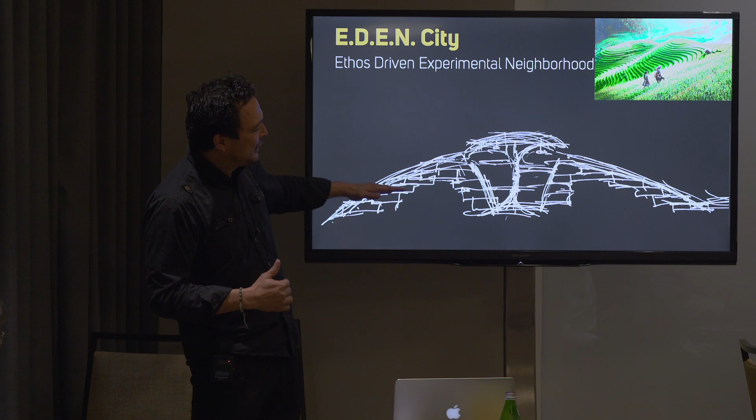But no, like the idea of using very cost-effective, simple — we're really trying to do anti-architecture here, basically. What if this wasn't about architecture? What if it was about actually using very cost-effective prefab, even shipping container, whatever.

But basically, just stacking those in a landform where we would use the land for retention, but we would also gain a lot of side benefits with that insulation, what have you. Stack that in a way that it kind of does create this kind of unique landform, but then at the center have a heart of the community, a gathering place that has that wonderful sense of spatial enclosure that all great gathering places, piazzas, third places around the world have.

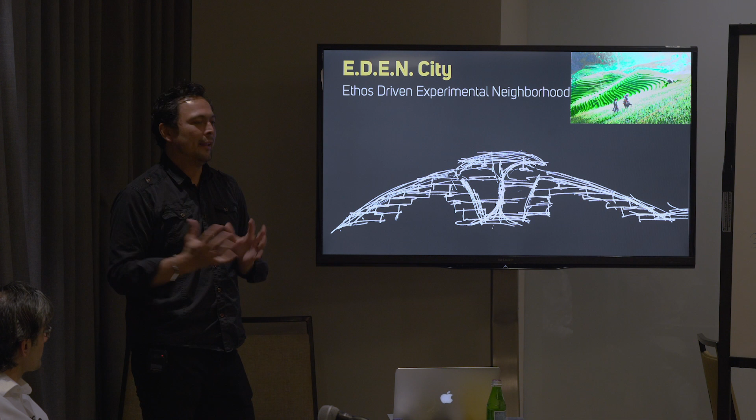Unfortunately, so often in suburban America we're missing that, when you're eating at the Starbucks in front of a big parking lot and you're just exposed to nature, traffic, whatever. It doesn't psychologically feel like a wonderful outdoor room with that sense of enclosure. We just thought, man, that would be really cool to have this wonderful urban grotto that felt like the center of a volcano caldera, kind of space.

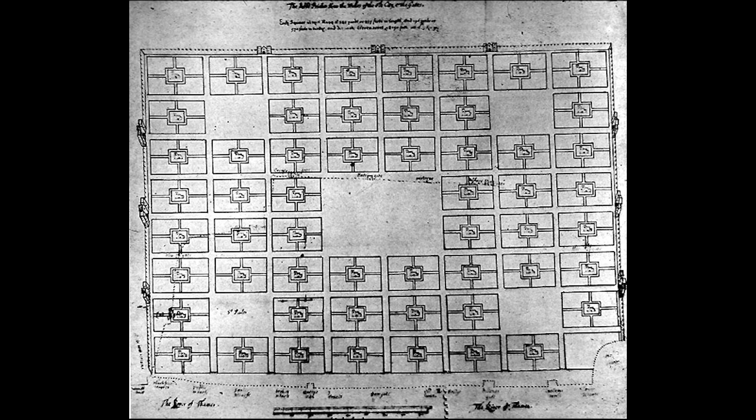And so this was putting the plan into scale. I could go on and on about urban planning history and what have you, but for the purposes of this thought exercise, we actually decided to place the project in North America. Shocking. And in North America, we have this history of the way the land was surveyed following the Jeffersonian grid and the Louisiana Purchase.

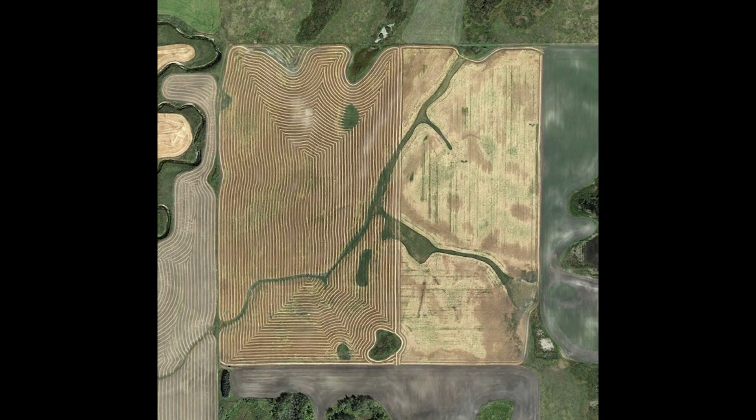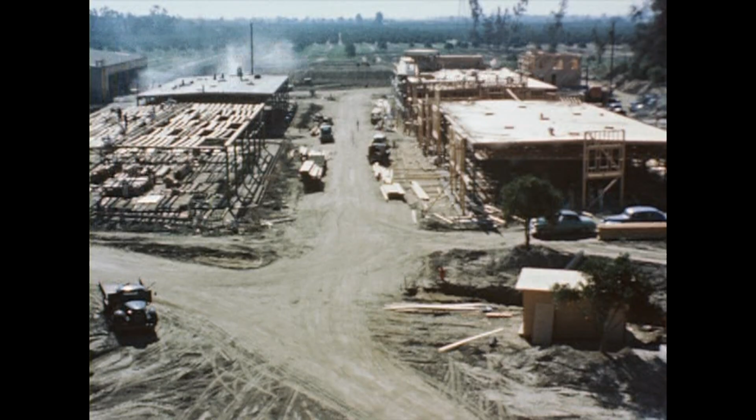America's kind of on this survey grid of a square mile grid. There's these 36 square mile, 6x6 grid townships. This phrase, 40 acres and a mule. The reason Walt Disney bought 160 acres in Anaheim was because that was the typical quarter section of land, that quarter mile. And so again, we actually based it on this cellular scale.

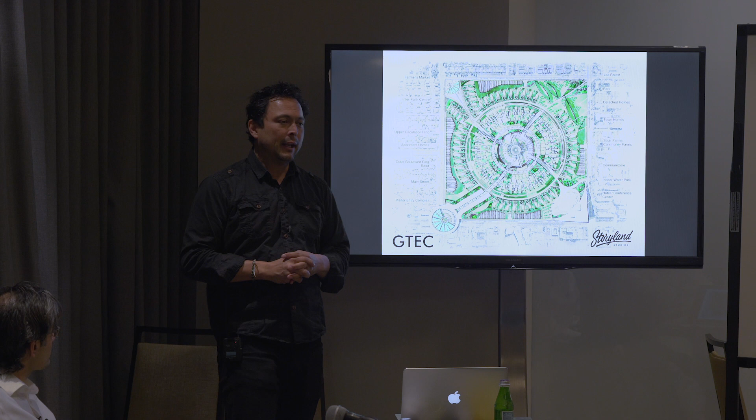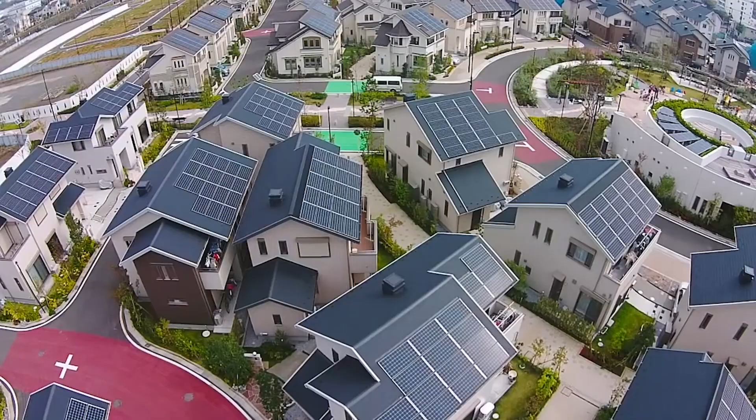We asked ourselves, what would be the minimum critical mass? Not just for a standalone prototype, utopia, whatever you want to call it, but what would be the seed that could turn into a tree, that could turn into a forest? What could be this minimum critical mass that could be not only an experiment for an individual neighborhood, but something that could be a viable model that could be replicated into an entire urban city and potentially an urban world that could be a more sustainable path forward.

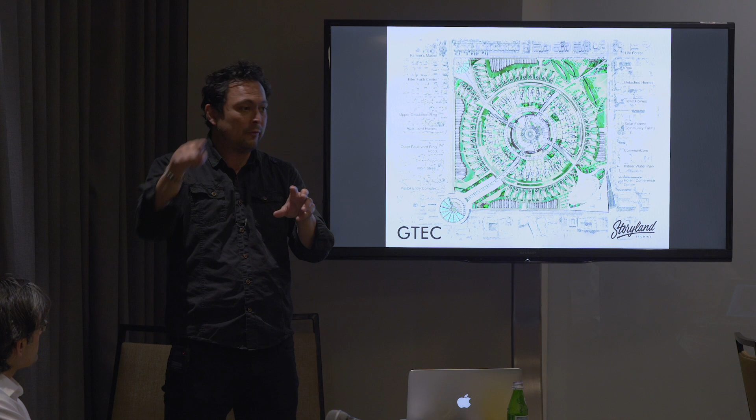So with that, we actually looked at what would be the appropriate scale. We didn't look at even a square mile, 640. We actually brought it all the way down to the old 40 acre and a mule scale — what would a minimum critical mass neighborhood look like at 40 acres that certainly could be scaled up to include 4 of those nodes, 4 of those neighborhoods, into a very walkable 5-minute walk radius, quarter section of land that would be about the size of any medieval walled town.

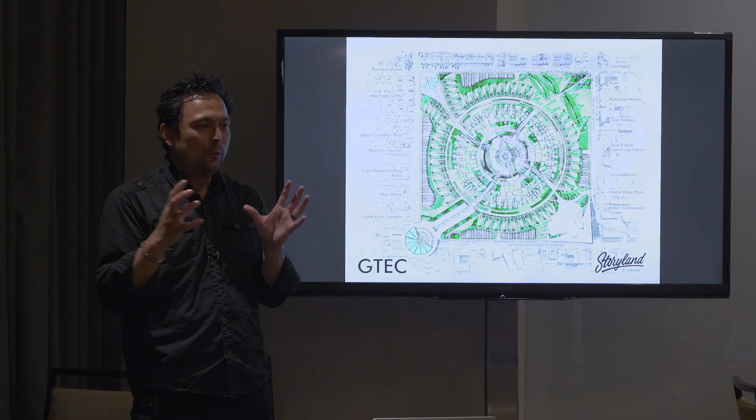Think of Siena or a Tuscan Hill town. 5-minute walk to the center of the town well. But we wanted to start off with that great human scale. So that's basically what you see represented here is roughly a quarter mile section.

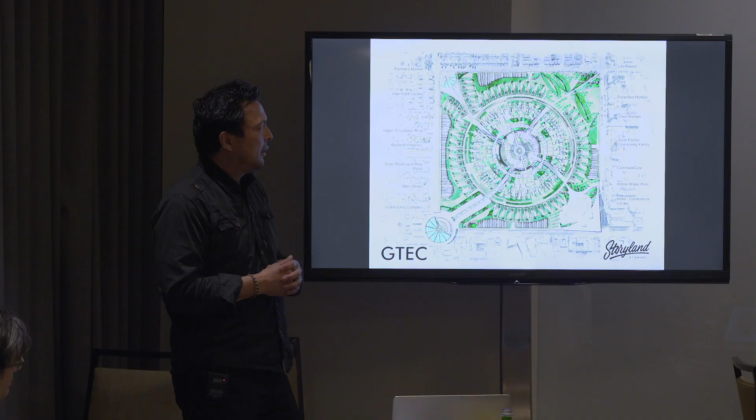Just a couple of behind the scenes, under the hood kind of operating paradigms. One is that economically we had one foot rooted in the world that I live in, which is working for for-profit clients that have IRRs and ROIs and residual land values in an urban context. So basically the idea that this had to be economically not just sustainable, but actually had to have a business model.

So just some fundamental things that can be easily thrown out: one, that there's an economic engine here, which is actually twofold. One is that it would be something worth seeing, that this would be a critical mass visitor attraction that could be located in a major U.S. urban area.

It could be located in a tourist area, so places like Orange County, Orlando, or Dubai, for example. The second, there's a major visitor component, with a potential revenue source here of hotel, conferencing, and so on.

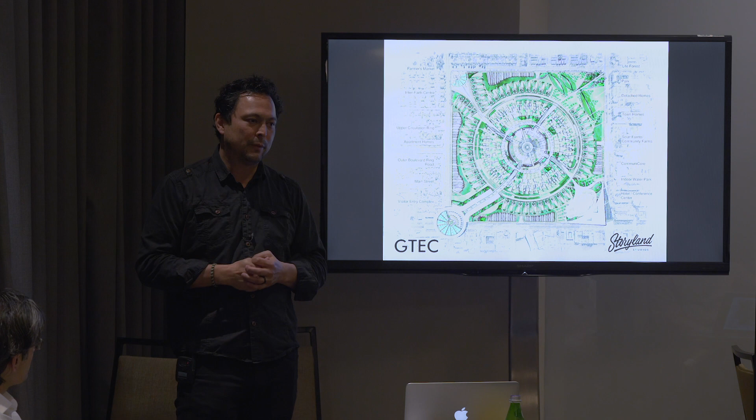The second component is a model that wasn't too far-fetched. There's been tons of Quaker and Mormon and religious colonies and utopias in history, but what we thought wasn't too crazy was the idea of a lifelong learning village, essentially a college town, that classic town and gown model, whether somewhere we'd like to emulate, like Oxford or Cambridge, or somewhere we can stick our nose up at, like where I live in Irvine, Orange County.

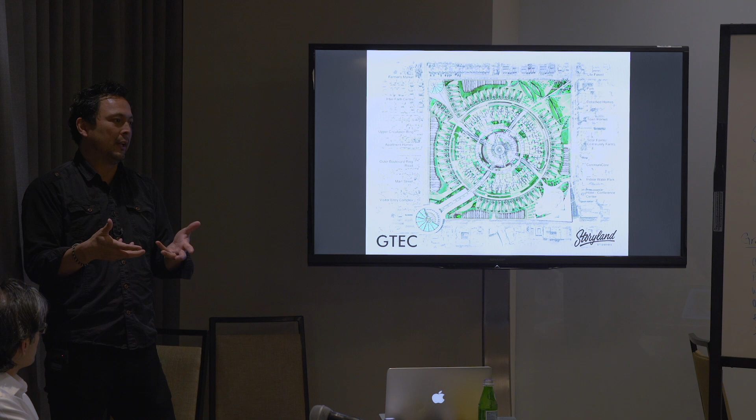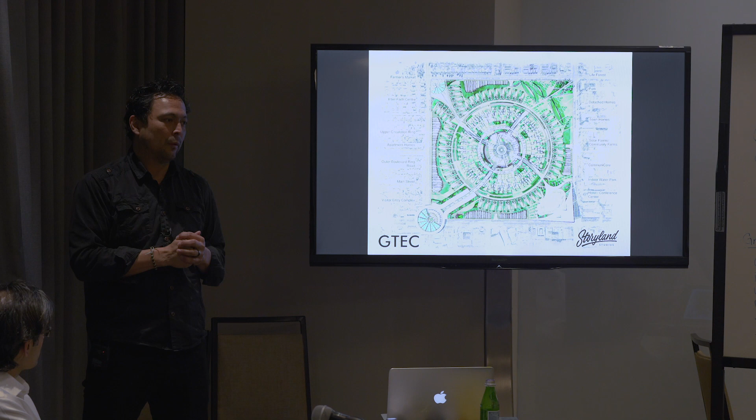That idea of a college town model, but not just oriented around college, but lifelong learning, would really self-define who would have the opportunity to participate. It would also shorten the duration. These wouldn't all be lifelong residents - you'd have a solid majority of folks here for a certain duration, whether based on their education, their specific aspect of development, or they're part of building, nurturing, ongoing maintenance, or faculty or staff.

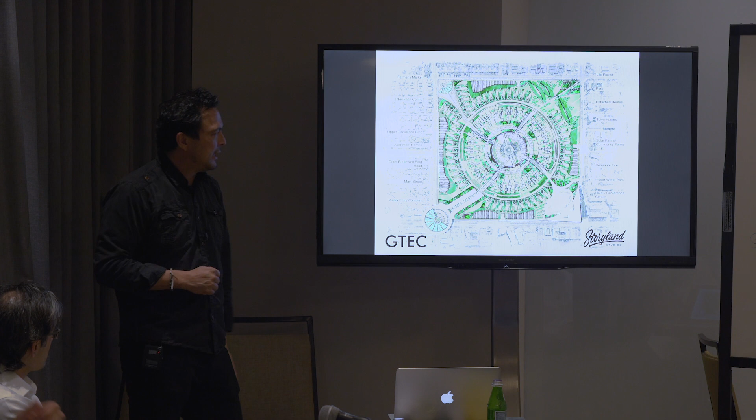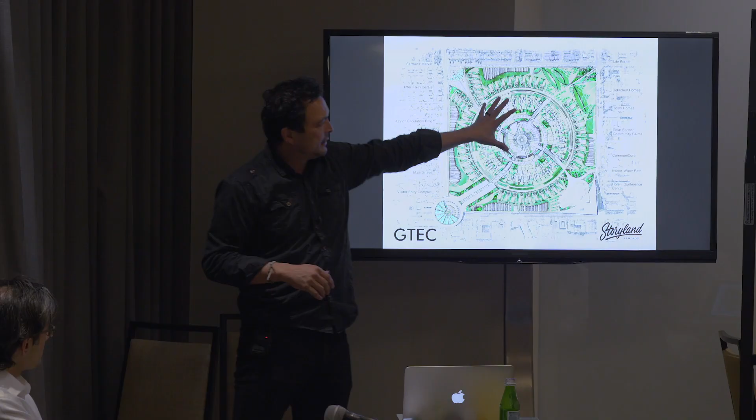So those are some high-level points I won't get into further. Essentially, what we have is a 100% intersection, and essentially what we've done is nothing too crazy - the parking is at grade level. We've got a couple of access points in the grid, so we're not doing a massive parking structure.

What we've done is structure the development - many of you live in areas where you see these podium apartments going up, with the same 4 or 5 story stick-built apartments above ground level or podium parking. So it's essentially that type of construction, nothing too radical.

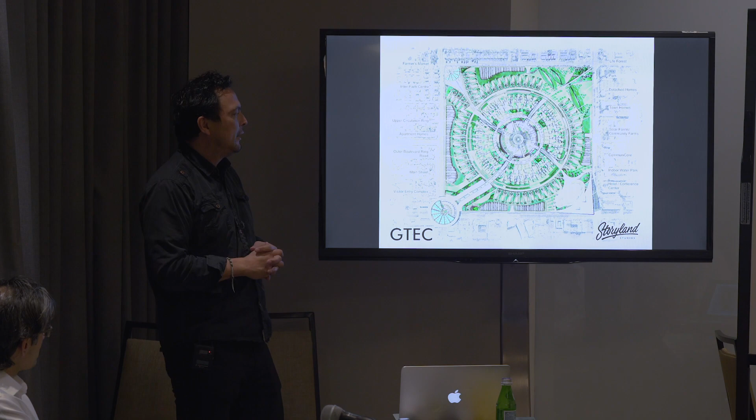At the 100% intersection, there's a visitor entry complex that would be the focal point, the first impression, primarily for visitors. The radius is defined by that core 5-minute walk to the center - this is the central piazza, town square, that we're calling the community core.

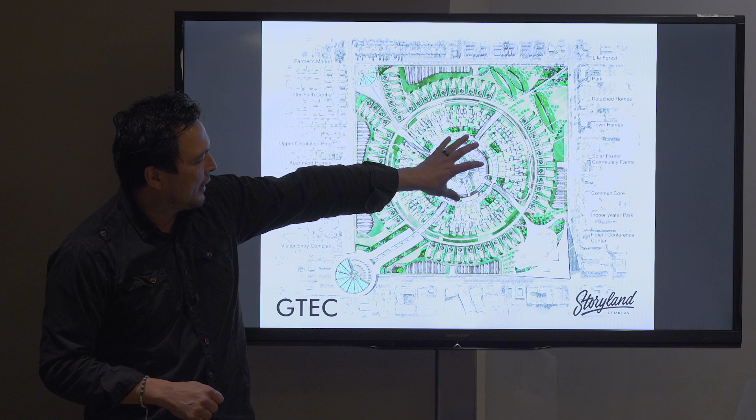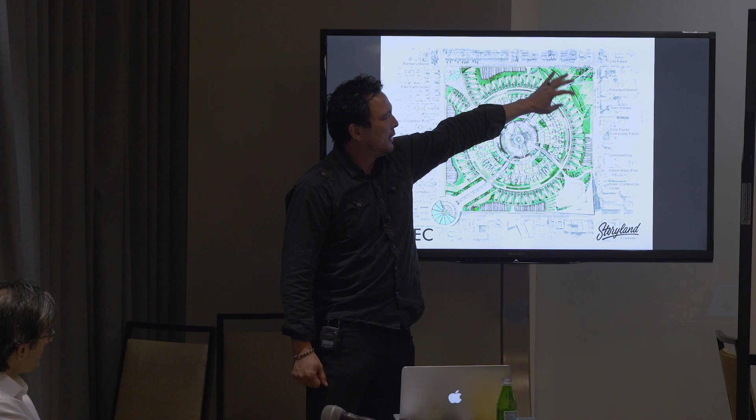Along the edges, we have different uses - for example, the hotel conference center over here, this idea of a park combined with a life forest, which is an alternative to a typical cemetery or graveyard, a farmers market, and some different focal points at those commercial corners that could be viable for adjacent neighbors.

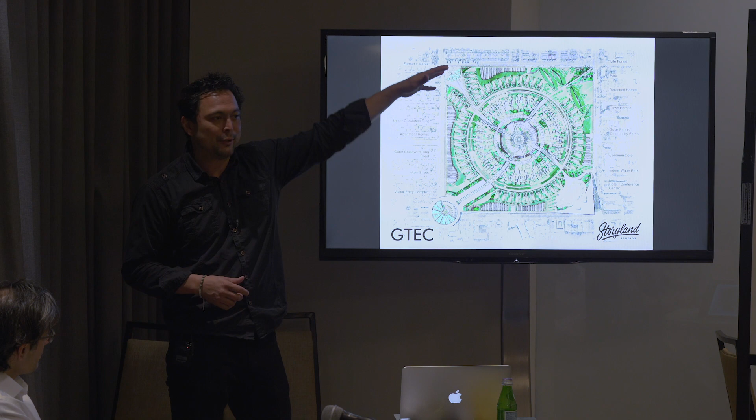So at some level this works as an urban infill project. It also works as a standalone project that could be sitting out in the Nevada desert. This is just an aerial view, and again, to be clear, there's no architecture here - this is quick vision-casting 3D modeling.

The idea of this elevated pathway largely carries an elevated track for the personal rapid transit system, which is half a ride - it's an attraction, part of the appeal, similar to a Universal Studios tram tour or the old Disney People Mover. It's a visitor attraction that anyone would come through without getting in the way of residents or students.

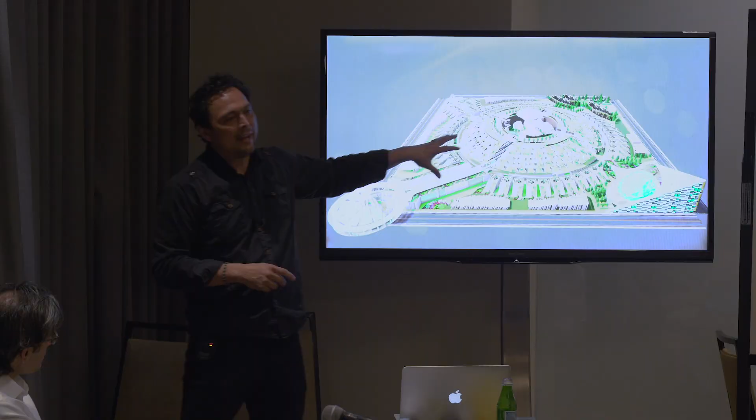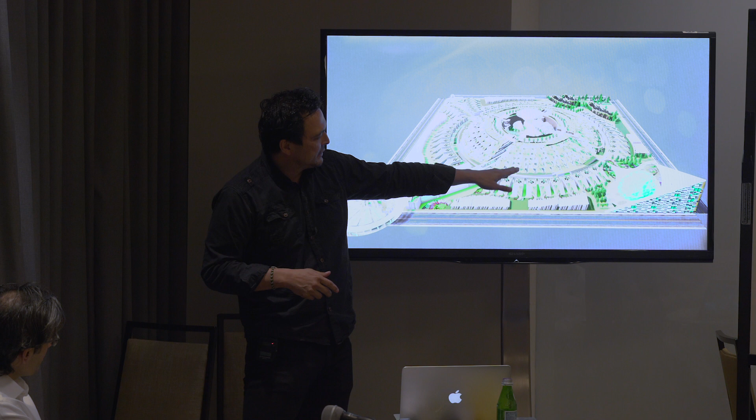It's kind of an elevated guided path that is not fixed rail, but part of the attraction component. Separate from that, there's also a system for residents to use. Here you see the stacking of the containers, simply using the roof of the neighbor in front of you as your front yard, so everyone gets equal green space.

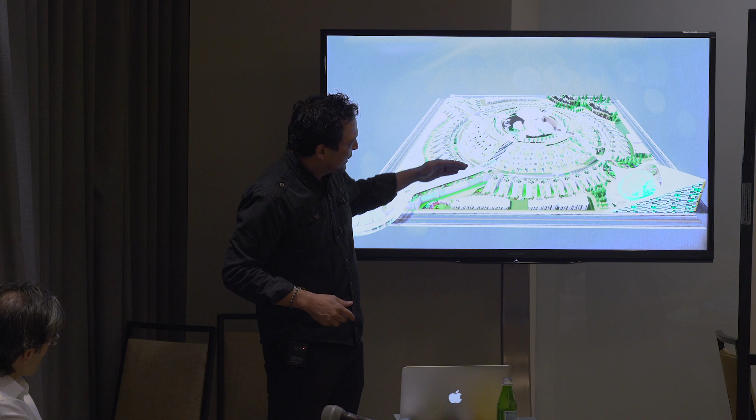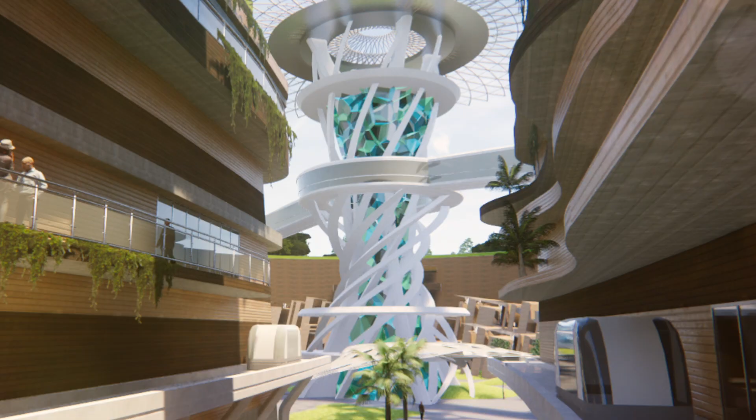The main street curves through the slot canyon, inspired by the slot canyons at Zion, and then you emerge into this wonderful sense of openness with the exterior canyon. The centerpiece of the whole thing is this metaphoric tree of life, a visual icon center tower. This is looking quickly from the 100% intersection, the entry pavilion, the PRT tracks.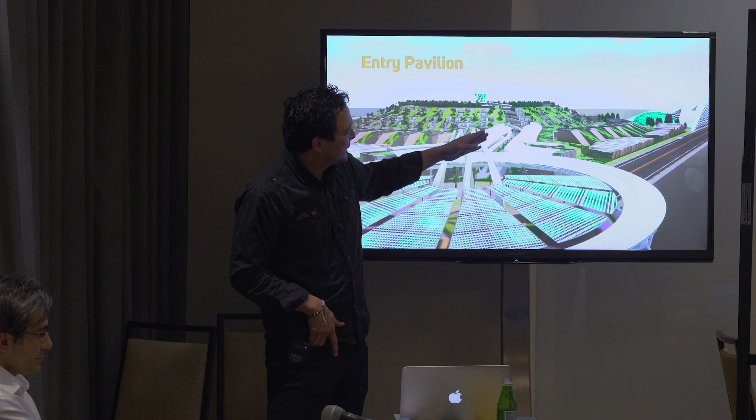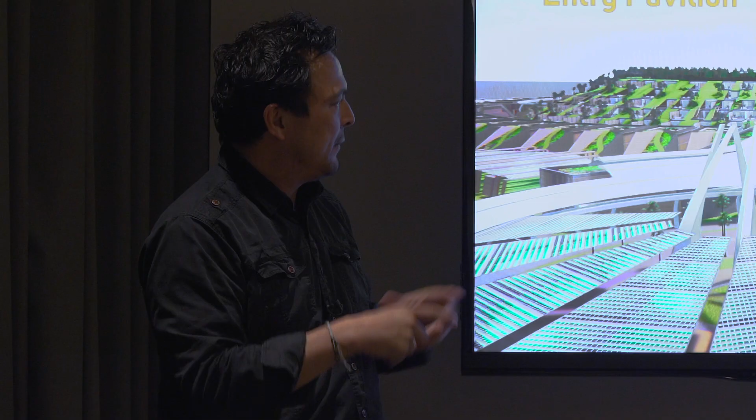Instead of a direct axial main street, it's a little bit of a sinuous curve that creates a sense of discovery, like walking through a slot canyon or a medieval streetscape. And again, the scale - we really tried to make this a human scale, like an Italian hill town, nothing overly urban like Manhattan.

This is the scale of how people lived before elevators, in terms of that 3, 4, 5 story scale, which is also, by the way, cost-effective from a construction perspective.

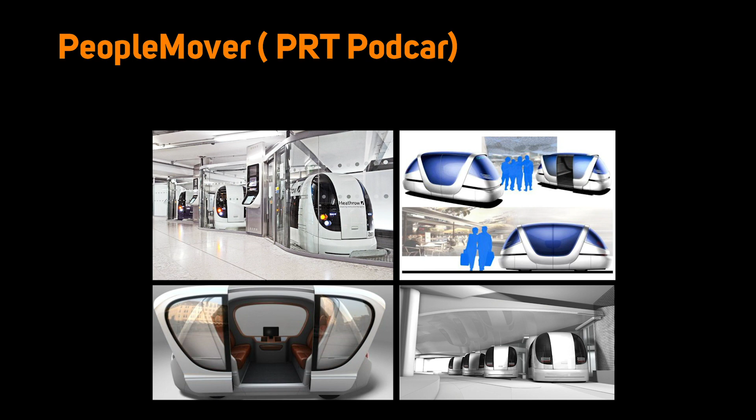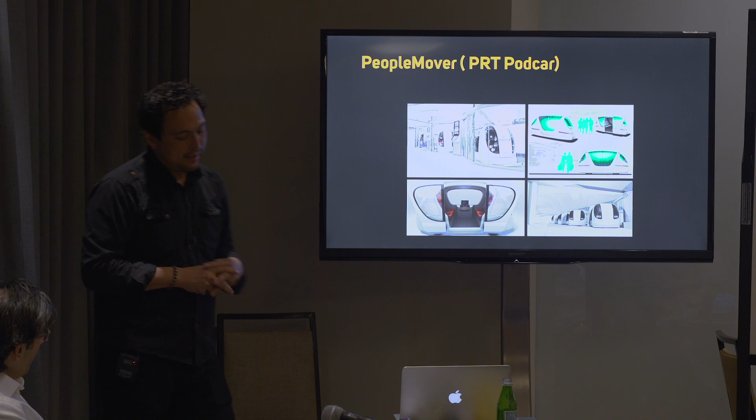This is essentially the primary transportation technology - the idea of self-driving cars or privately owned vehicles being parked at ground level, but largely underneath the core of the community. Visitors and residents would have access to the trackless automated people movers.

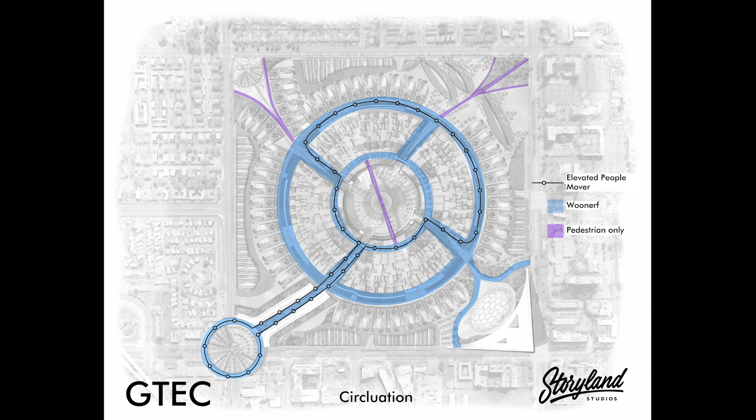This is the tracks of the elevated people mover, giving kind of a guided tour, emerging both along the outside perimeter to really be exposed to the central piazza, agora, but then also getting a look underground at some of the interior infrastructure, vertical farming systems, as well as letting people get around.

And then the largely multi-use streets that are for the neighborhood electric vehicles, as well as pedestrians, based on the Dutch concept of the Woonerfs, where kids can play, but you've also got local access to bring your groceries to your front door and so on.

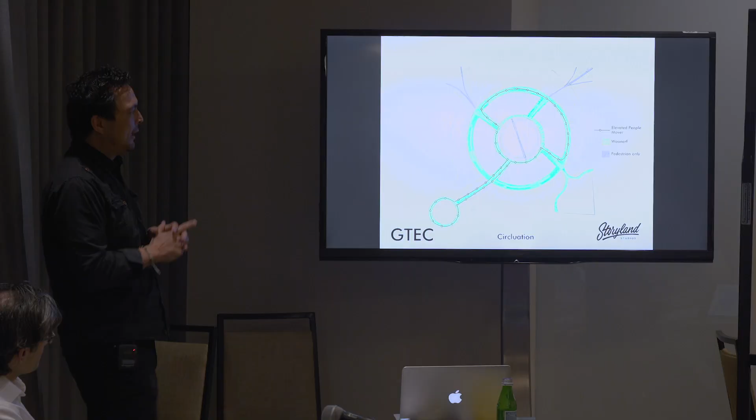And then pedestrian-only paths, including this kind of fun cantilevered bridge that would cut across an upper level at that central hub.

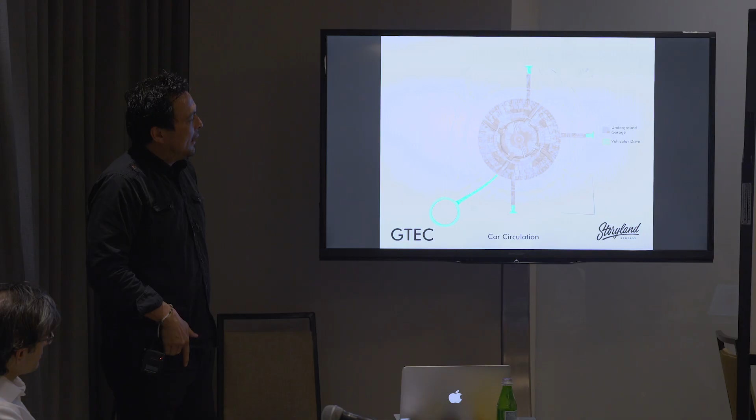So this is just more of the vehicular stuff I talked about, the parking access into the underground garage and the central vehicular drive.

By the way, we abstractly modeled it based on U.S. Census data of the different household types and different ages, so it kind of represents a petri dish sampling of that U.S. demographic based on the census.

In terms of the units, we've got everything from 400 square foot urban lofts, largely overlooking the central piazza, wanting to be above the nightclub and the restaurants and bar scene, all the way to 2,400 square foot, 4-bedroom, mid-century modern, detached house.

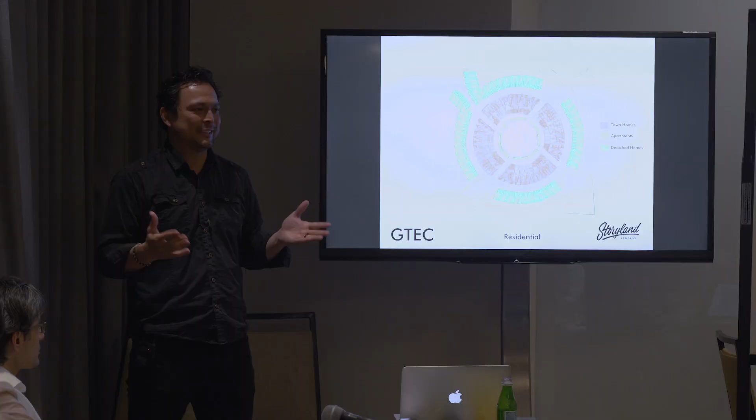So one of the ideas was just having diversity, a diversity of choices, so you're not forcing everyone into living this higher density urban loft lifestyle. If someone wants to have a 1,600 square foot townhome, it's all based on a very simple 20-foot grid.

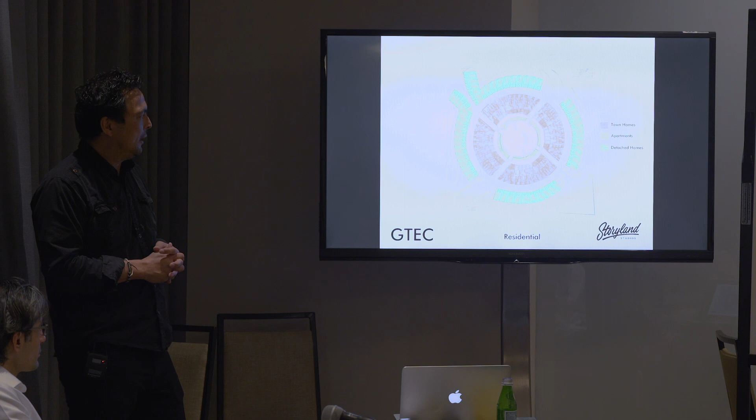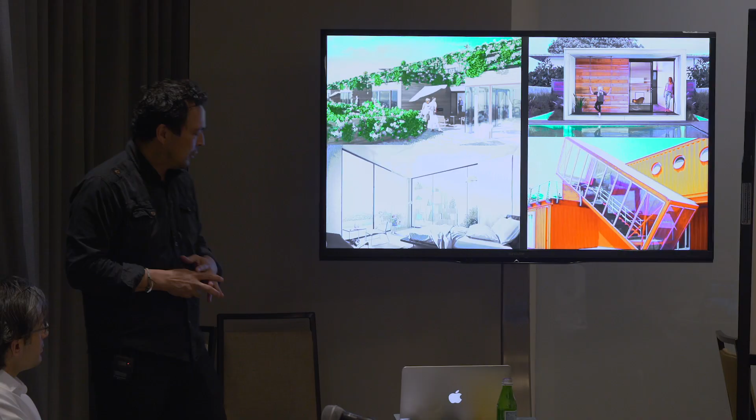Again, really everything from the detached homes to the studios can be done in these pretty cost-effective modular construction types. A couple different examples of that, from the smaller units to the larger urban units, again modular structure for one of the larger 4-bedroom, 2,400 square foot homes.

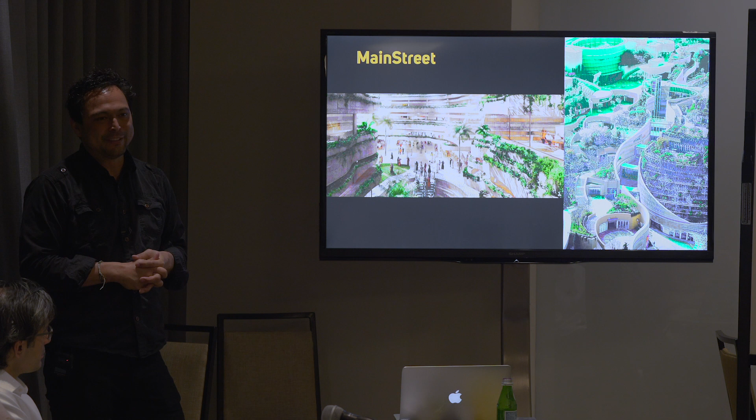The concept of Main Street taking on that organic form that is modeled in scale after a Tuscan hill town, but may have a little bit more of that environmental sustainability worn on its sleeve, definitely apparent in this blending of garden and architecture through the space and having that intersection.

So I think that's, by the way, the hotel, the Blue Planet Water Park.

This is again looking down the Main Street, the visual icon of a Tree of Life, again attraction, restaurant, visitor center component in the middle, and then down at the bottom you'd have the mixed-use retail Main Street and restaurants, cafes surrounding the circular piazza.

So very much a focus on an active Main Street, town square, that really is the focus of the retail cafe. This is a few images for that center town square concept.

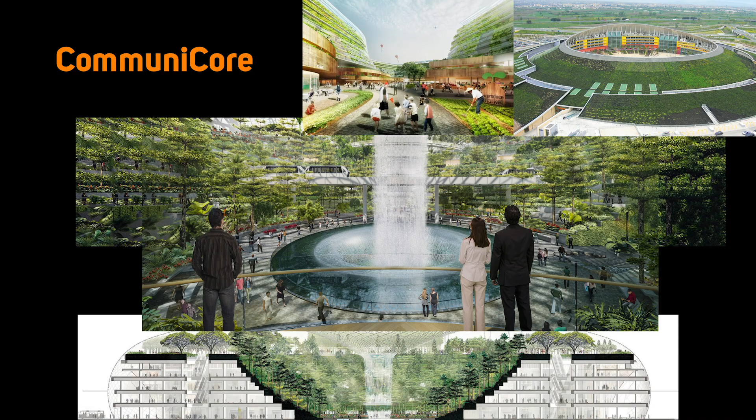So again, the idea of this kind of oasis grotto in the heart that really is very lush, verdant, green, but also quite urban in terms of that vertical mixed use, having that active edge retail.

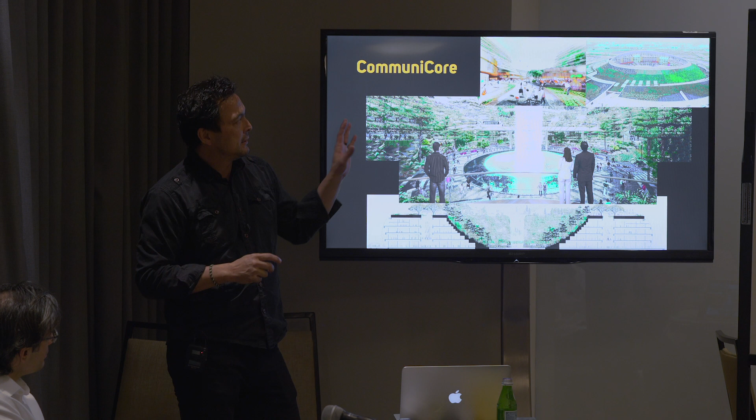This is actually an image of a shopping mall that was based on a volcano far in the horizon line in the distance. It was done in Italy, a similar concept in some level.

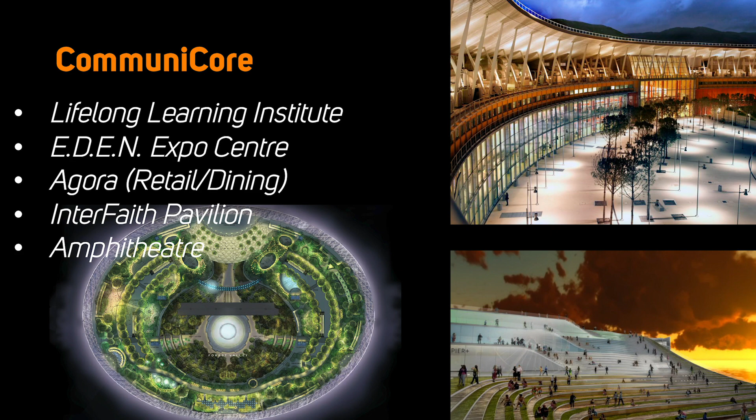And so again, in this CommuniCore, things like the Lifelong Learning Institute, this experimental education district, the conference center, the Agora, retail dining entertainment, an interfaith pavilion, and an amphitheater that would be part of that blending.

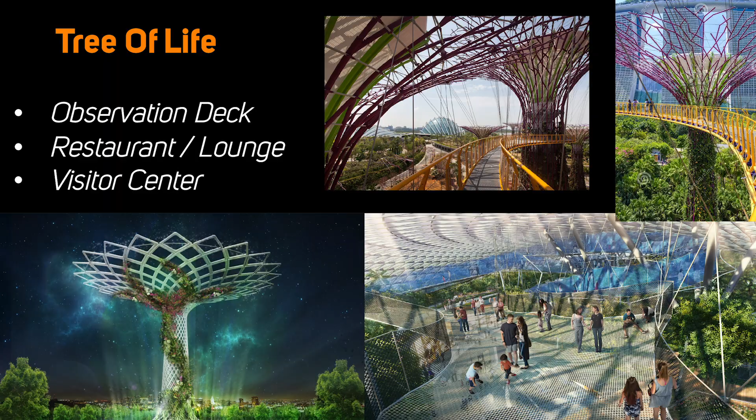And the Tree of Life would be this kind of iconic attraction, again visitor center, restaurant lounge, observation deck, a couple different ways of doing that, but the idea of having a recognizable landmark. We thought that Tree of Life metaphor was one that's pretty universal and non-controversial.

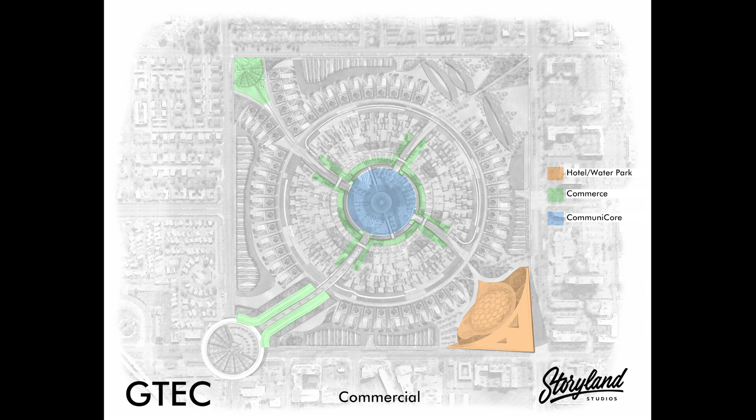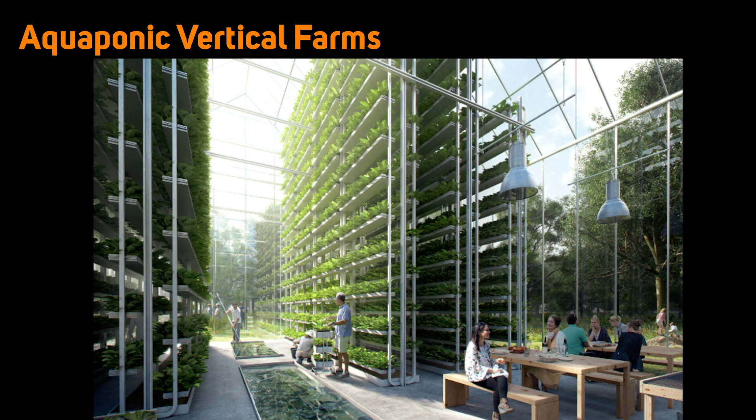Again, some of the perimeter uses we talked about were the hotel, water park, and the Blue Planet. This is some of the environmental infrastructure with the solar panels, the farms, interior container farms, the living machine for processing of the water. Some quick design imagery for that, the Life Forest Park, the Big Blue Planet Aquatic Center.

This functions essentially like a Great Wolf Lodge conference indoor water park. Any of the Gaylord properties are doing the same kind of thing.

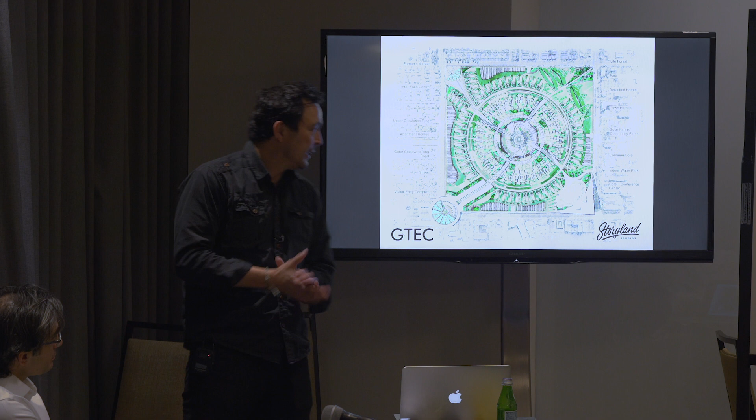So that's all I drew up. Anyway, just wanted to share some of the brain damage that had occurred before you guys got in the room. So we can't wait to build on a little nugget.